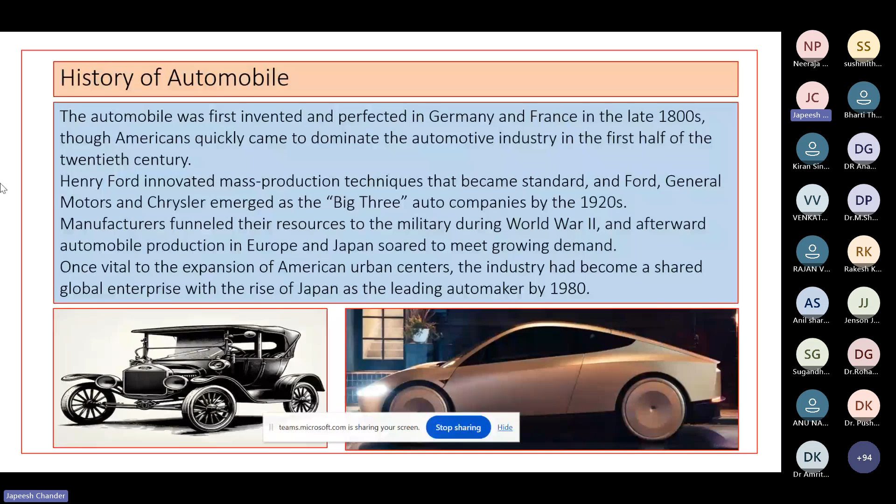So the early materials we were focusing on were only wood, metal, and leather. These were mainly used at the early stage: the wood framework and steel frame were used for making the body in white, meaning the shell of the cars, and leather for the interior.

Then some natural resources were used, like material which was in abundance in the localized region. Before globalization, the items or material available in that particular region were used. Like in today's scenario, we are more concerned about the 'vocal for local' slogan from the government, that we should put more focus on our local products, and that is one reason we are bringing all the industry to India. So we have a better future, better production systems, and better infrastructure.

Same is the case with production techniques. Earlier, how were they producing things? Look at the cryogenic engines. Nobody was sharing their technology on how they make the cold fuel so cold that it densifies, increasing the density so that they can store a huge amount of fuel in a small space, and it can run for hours, more than imagination. So for those production techniques, chemical engineering, mechanical engineering, and physics have all played a very vital role in these developments of material.

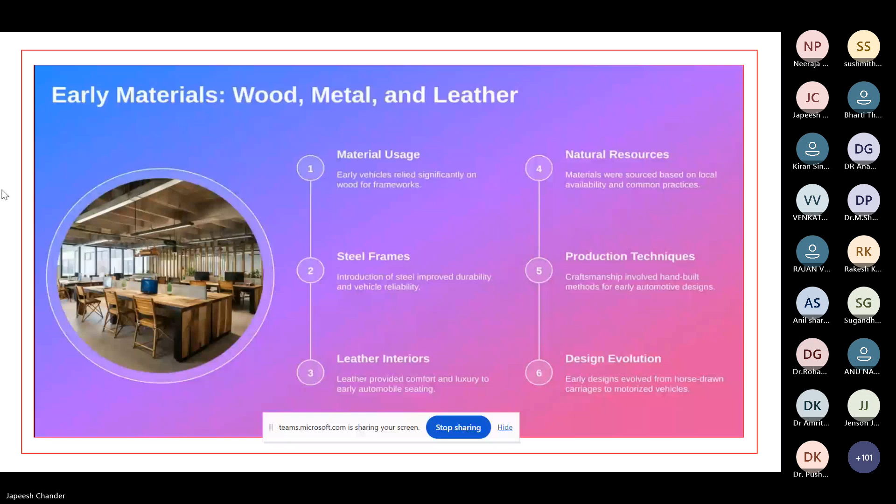Just to give you a small overview of the wheel: look at the initial stage, how we were using a wooden plank, just a wooden disc at the very beginning. And now we are able to make a carbon fiber wheel which can take a load of 535 metric tons.

Antonov AN-225, this is the Ukrainian heaviest payload aeroplane. It has its own weight of 200 tons, and it has a capacity to carry around 225 to 235 metric tons. That is almost 50 cars. All credit goes to the changed materials, the new innovation materials, the new processes, how they have synthesized the rubber and the carbon with the fibers to make them so solid and strong that they can withstand shock as well as endure the tremendous load on their back.

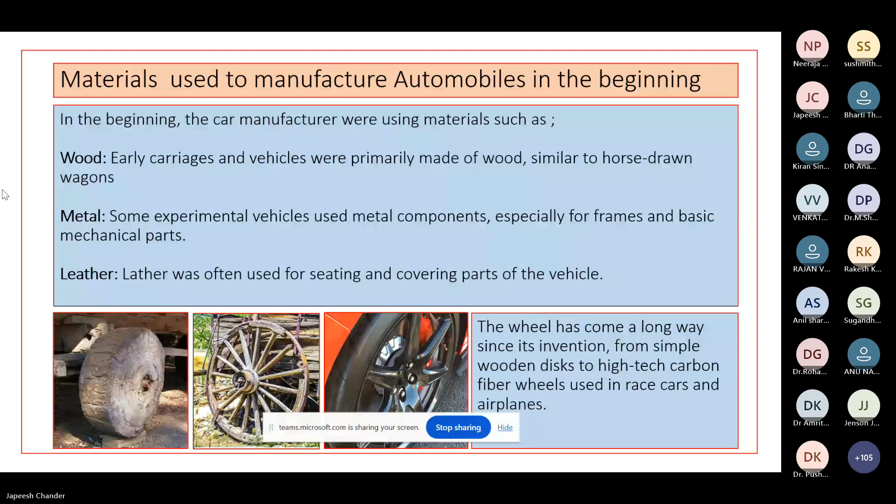Why were we discussing all this? Because of the necessity for these materials, which we must all be aware of. There was a series of global summits that took place.

1972 UN Stockholm, where we were more concerned about the environment. 1992 Rio Earth Summit. 2015 Paris Summit, where we became more concerned to save our earth because of the amount of load we have put on the environment on account of pollution, the landfills, the air pollution, the water pollution.

It is becoming horrible to live on the earth, and all this can be achieved by innovating new materials. Those materials should be sustainable, should have low carbon footprints, and should be manufactured in the industry at low cost.

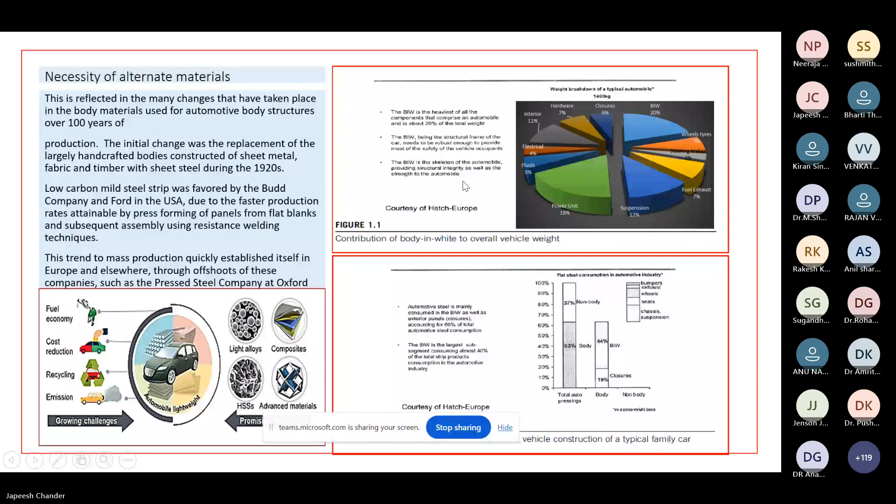So the main focus is sustainability in automotive. We should find materials that are more sustainable, which will help us sustain more innovative materials in the automotive sector and industries. I will show you some videos and pictures of how we have changed the scenario, how materials have evolved to withstand high temperatures, and how they are useful or create less pollution in the whole system. When we reduce weight, we are altogether reducing the load of the supply chain.

Suppose if a car of 1 ton has to be transported from one position to another, there would be some amount of carbon footprint left behind. If the same car with same capacity for 5 passengers and same durability, but of low weight, 900 kg or 800 kg, every 9 or 10 vehicles will spare one vehicle. The footprints of transfer and manufacturing are going to reduce. So that is how we are heading for sustainable development goals.

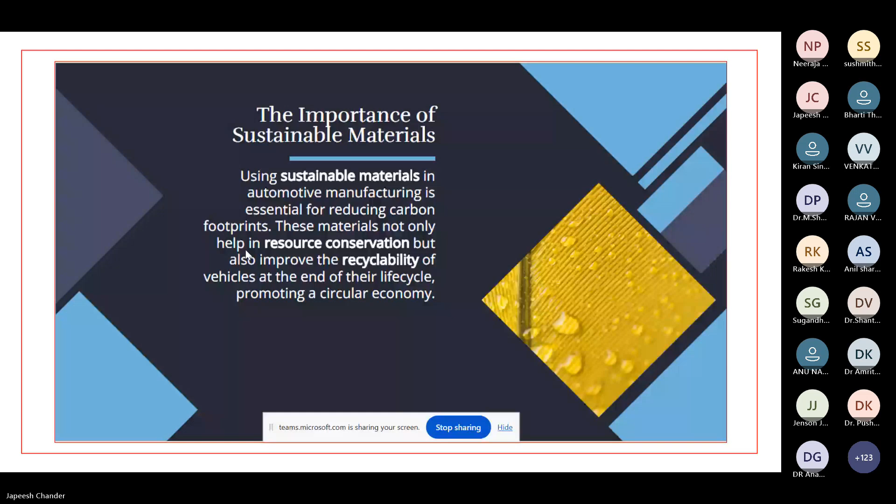Green sand casting process helps us cast components like gray cast iron, malleable or SG cast iron. And LFC is a lost foam casting process. These are the differences in the processes which I'm trying to explain here.

In the casting industry, casting is what we are manufacturing, and then it becomes the housing for other components, like you might have seen in the gearbox or the engine block. The engine block's outer casing is casting, the gearbox's outer casing is casting. I'll show you pictures of that.

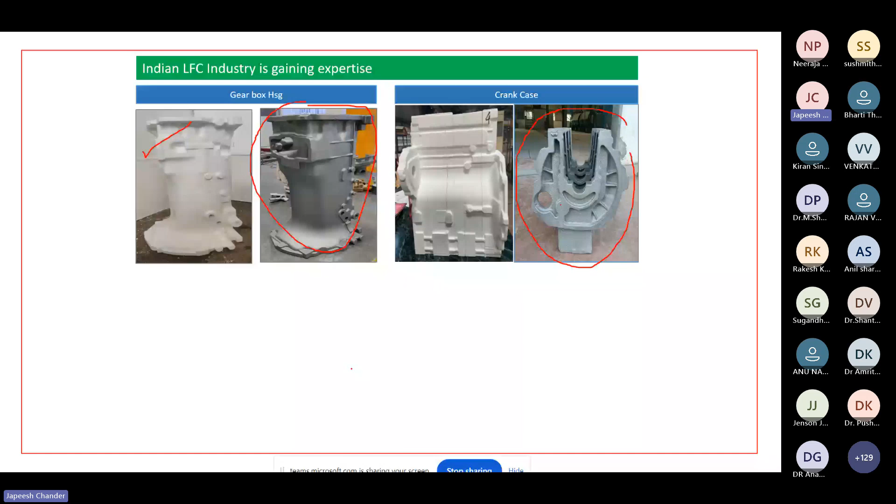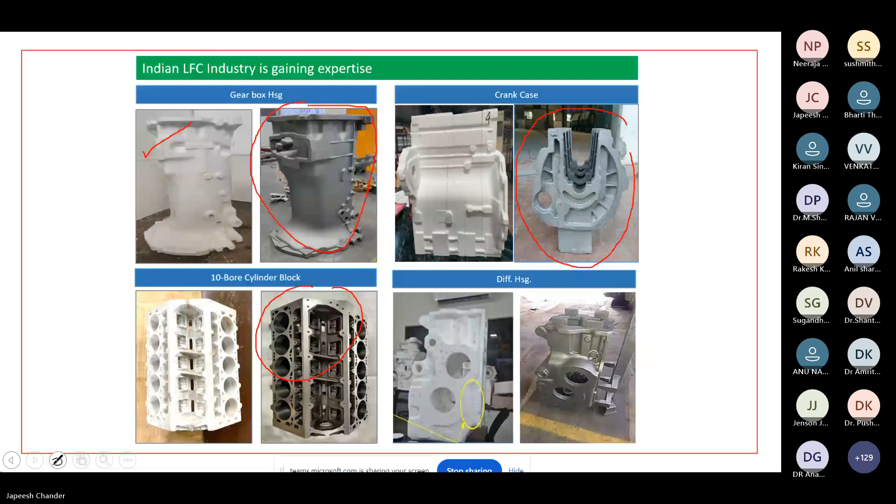So this is more important to understand why and how we are going to improve our material efficiency with the help of new materials that are lightweight. Now aluminium is also making its presence in the tractor industry. Earlier it was used in motor manufacturing or small casings, like motorcycle or scooter engine casings. Now it is also going into the manufacturing of tractor parts.

This will be the same way with magnesium. This is enabling agility and durability. Furthermore, another element which is making its way into the automotive sector and the tractor industry is carbon fiber composites. Composites are components of two different metals or two different items which have different characteristics, and once they are gelled together with the help of adhesive or some bonding agent, they give rise to a different component which has different properties.

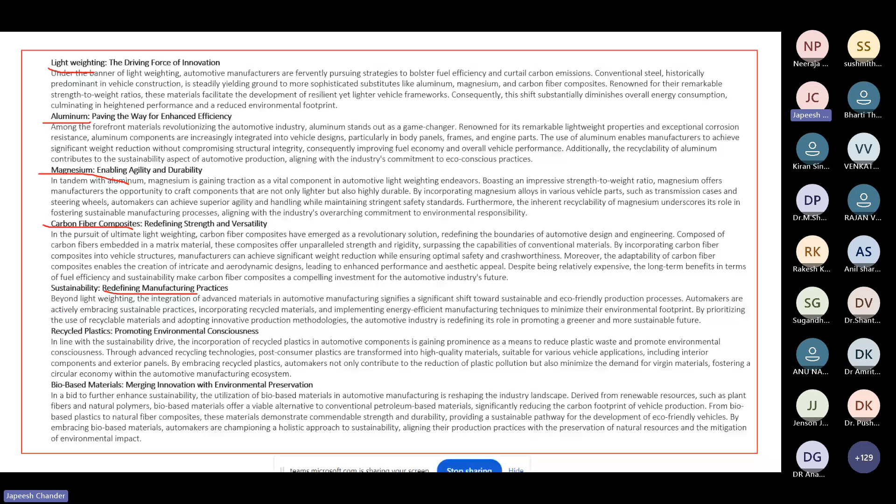So this way, using carbon fibers, magnesium, and aluminium for lightweight components, we are heading toward the sustainable objectives of our industry, redefining the manufacturing processes. When we are going to machine a lightweight component, obviously we are going to use fewer inserts in the machines.

At this point of time, I'll take you through another one more interesting example. So I'm just projecting another importance of material. Like when we are talking about the automotive industry, there is casting, and there is also forging. So I'm taking one example from the forging side, where we are giving shape to the component.

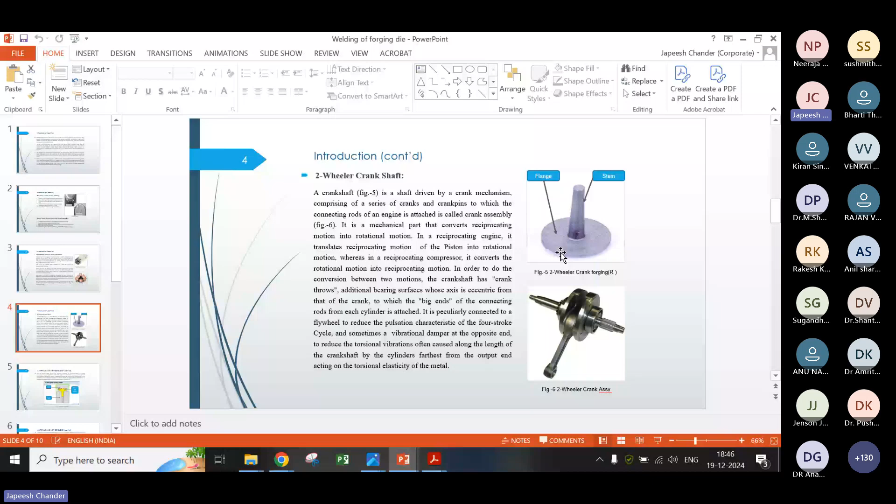This is the component, a two-wheeler crankshaft. The motorcycle or scooter we are driving comes with this sort of crankshaft which drives the whole motorcycle. So to manufacture this, we produce this particular component in the forging process.

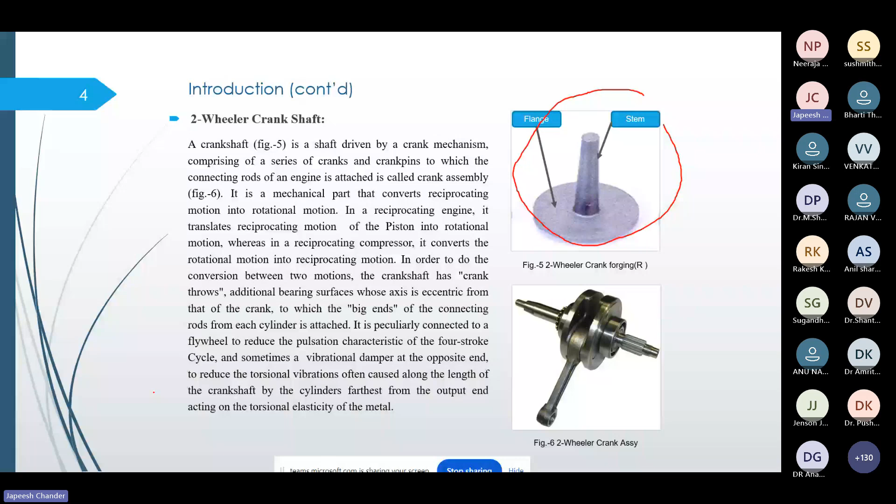So when we are producing it, there are dies which take the red hot piece and force it at around 1600 tons of load. You can imagine the amount of force being developed while giving shape to these components. Because of that, the material moves, the flowability of the material, thermal cracks, abrasion, and all these problems come, and these problems create issues for production economy.

If a die can produce 100 components and it fails at 80, it is a loss of 20 components to the industry, to the nation, to the globe. And if this die can produce 120 components against its set life of 100, it is a benefit for the company, the organization, the nation, and the globe, because it helps reduce carbon footprints. Everywhere you go, you will find this carbon footprint issue.

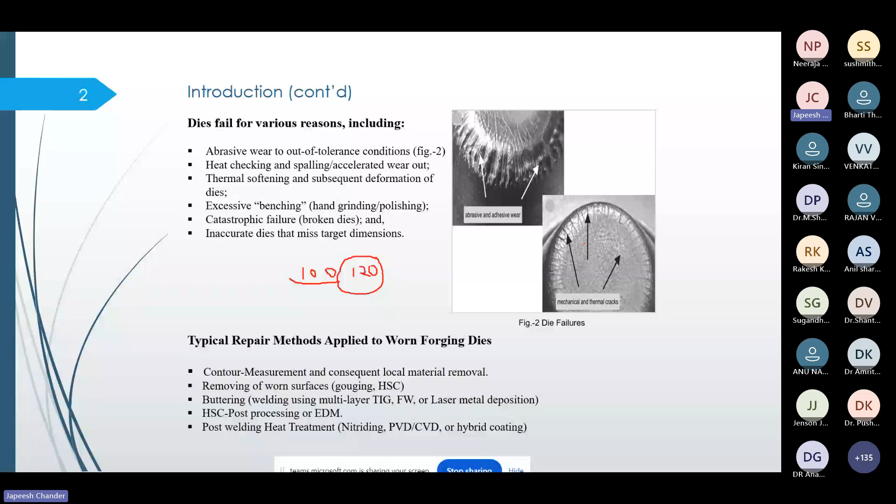So this is an actual experiment and actual development innovation which we have done in the industry. What we did, we made this die, we recut the die, and then we welded it. Look how the material is making its importance. We selected a welding rod which can help us withstand and increase the life of that die, which can withstand that 1600 ton force for longer times without getting deteriorated.

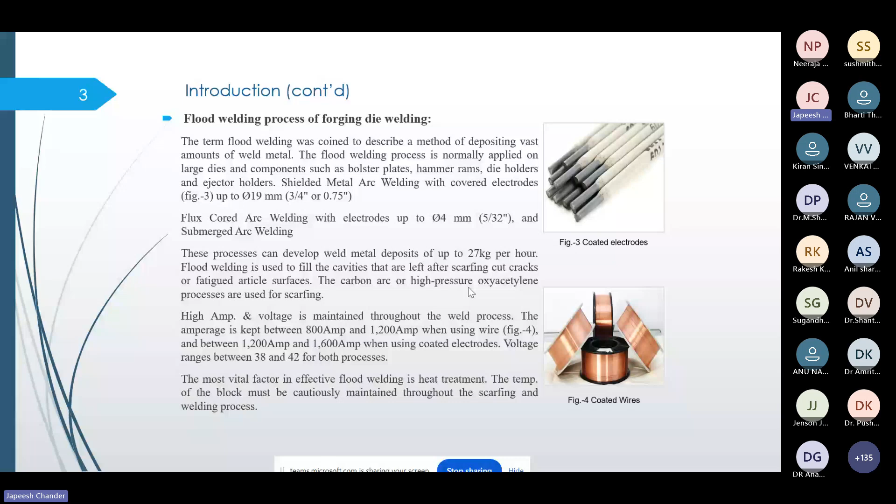Now this is the analysis. I'll tell you about all these simulations, how this material will flow. This is all linked with our chemistry - how the metal behaves at what temperature, at what force, where to restrict it, and while flowing, how it will create abrasion on the die, on the top face or the bottom face. All of this is science, all technical things which we need to simulate.

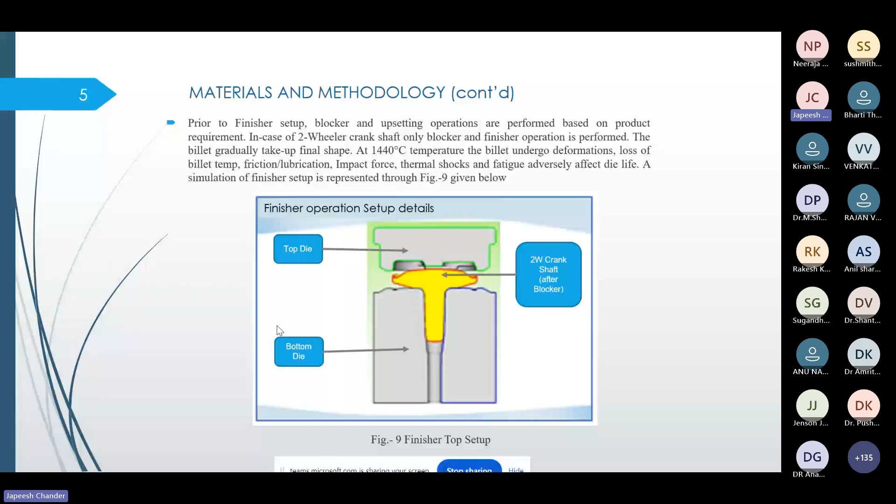We cannot build a big die and then take a trial. So these are the things our computer engineers can help us with, developing these softwares, so that with that amount of force, this forging process took place around 1100 to 1140 degrees centigrade, red hot, being forced with the pressure of a hammer, crank, hydraulic press, screw press, or servo press. A number of mechanisms are there.

When we are talking about hot forging, there are also processes like cold forging, which present different challenges and different positive points. So when we talk about hot forging, because of the heat, you can imagine that a component is a piece of metal, and this die is also a piece of metal, but its characteristics allow it to withstand more heat, more load - grades like D12, H13, H11, H10.

So a die faces a hot component which is around 1140, or sometimes around 1180 degrees centigrade, and on top of that, a force of 1600 or some 2000 tons. You can imagine what the scenario would be at that point, and we have to capture that scenario. Your engineers, your scientists have to capture those scenarios to make life easier for the industry, and this will help in reducing carbon footprints and heading toward newer materials.

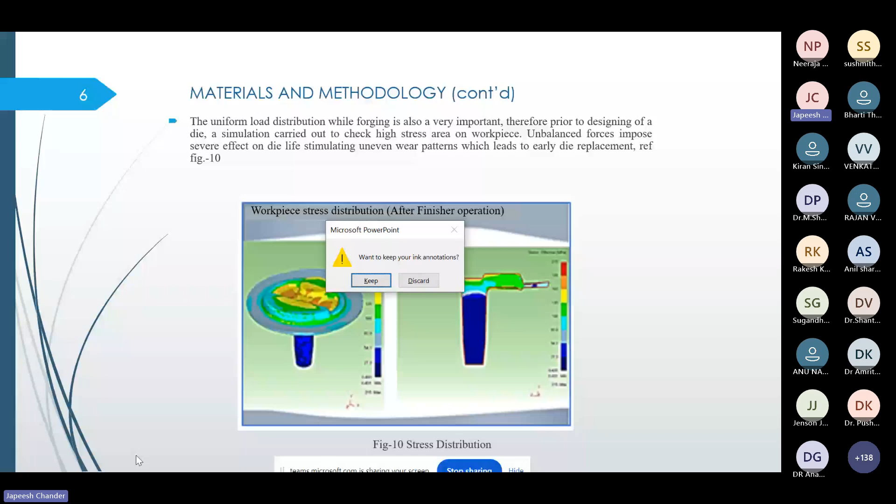Now, so what we did - we welded the die, we welded the die, and we heated it, and then we did the peening operation.

Peening operation in this material will help to make it more dense. The layer of welding, if you hammer the welding layer, it will allow more welding to accommodate in the same volume.

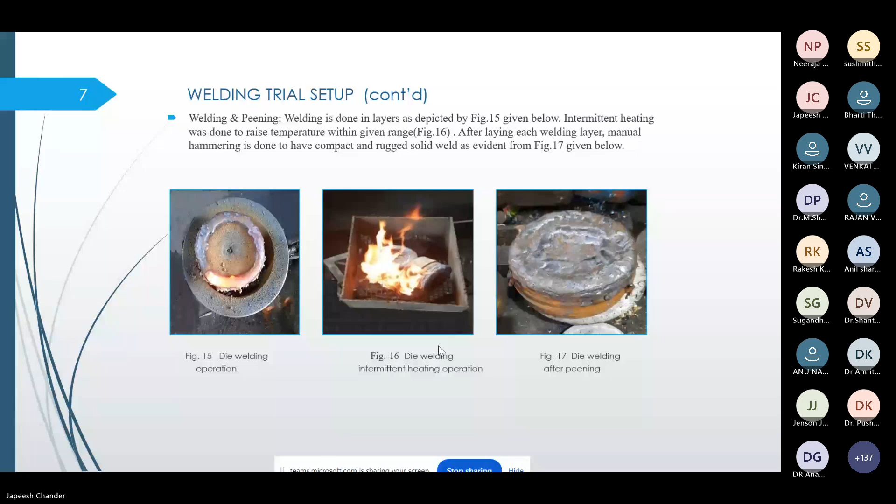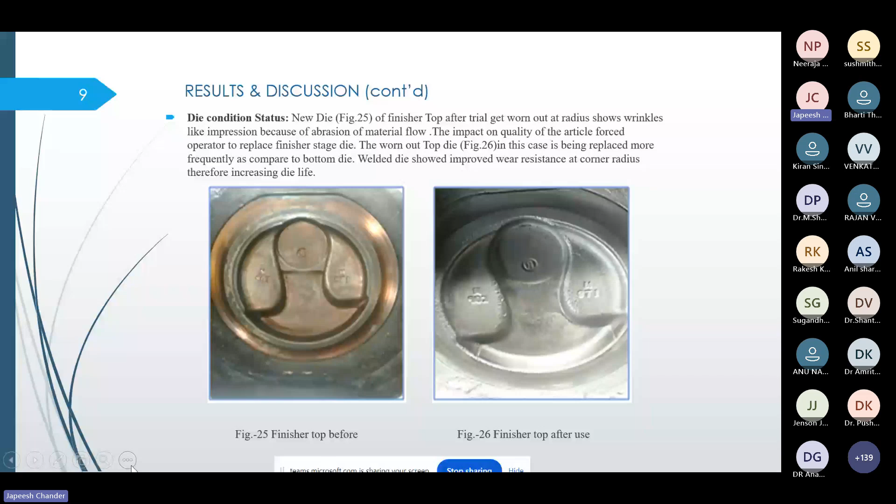Then we machine the die and use it. This was the initial die, and this was after the trial. By just changing the material or innovating a new method, a new process, a new material for welding, we managed to increase the life by 11.5%.

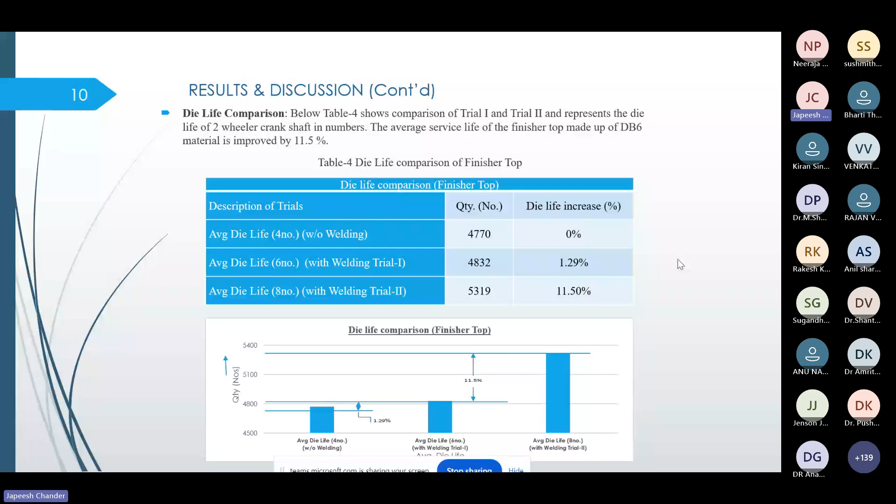This paper also we have published for the help of industry worldwide. So you can understand the material and the research on that material. It's very much required, and in industry, people are required who innovate things, innovate new materials, composite materials, smart materials, and all these are the need of the present scenario.

Going back to our slide, we were discussing why we want to go for these materials, because we need to make a sustainable stage. We need to set the stage for our coming generations in the automotive field. So more efforts are being placed on plastic.

You might have seen some gears in old vehicles or old motors, the metal or brass gears. They are now changing with new plastic gears, some embedded plastic, where the core is metal and outside is plastic, which are more resistant to wear, light, can be manufactured in mass without much wastage, can be reused with very low investment. This way we are taking industry to the next level.

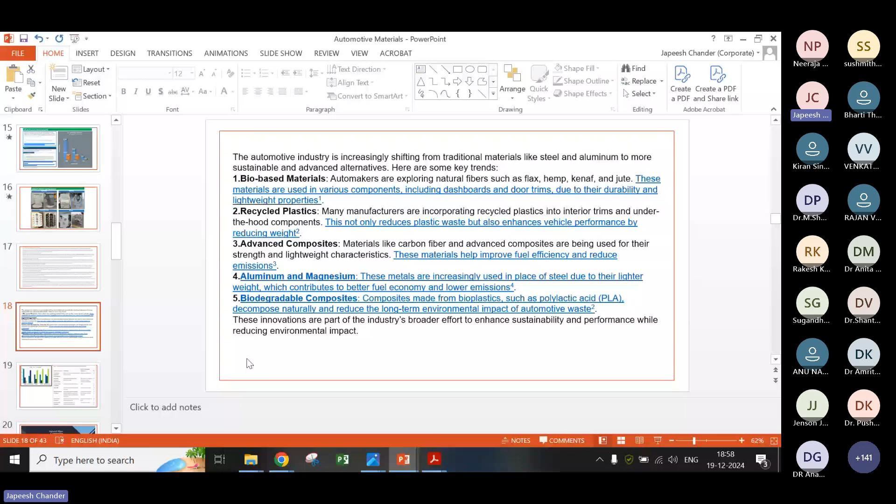Their stiffness... sorry to disturb you, interrupt you, but your screen is not fully visible. Please start the slideshow. I think the slides are also coming on the screen now. Okay, now it's okay.

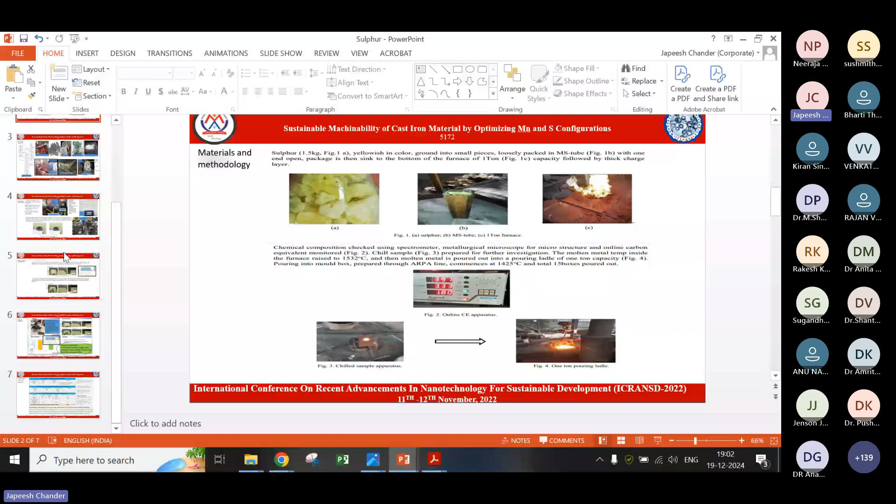This is about another slide which we are projecting to show you that we conducted an experiment and we succeeded in that, and later on we published this research.

We have added sulfur into cast iron Fg260. People from the chemical industry or from chemistry by background might know that sulfur is always considered an impurity in metals, but we use sulfur and harness different benefits from it. We increase sulfur - normally in the market, if you see Fg260 casting, the sulfur is only in the range of 0.05 to 0.08% throughout the industry if you search.

We just try to increase the percentage of sulfur. When we increase the sulfur, we also increase manganese in proportion so that it becomes manganese sulfide. Manganese sulfide is not a metal, it is not hard - it is a powder-like material. And when sulfur combines with manganese, it gives rise to manganese sulfide and gets embedded in the metal lattice.

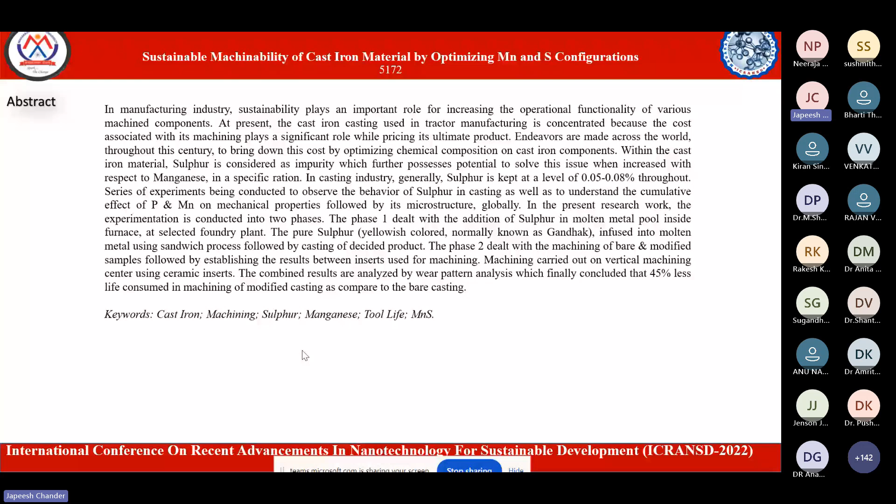It is not visible from the outside. When you put the metal under the microscope, you will understand that there are small flakes, similar to graphite flakes. So we did the trial, and this is very important.

You cannot add pure sulfur, which has medicinal properties, directly to metal because it sublimates. This is solid, and when you heat it, it becomes gas - it is not converted into liquid. It sublimates. So that was the major challenge for us: how to mix sulfur in the metal.

So we carried out trials. We make a hearth - if you see on the right side, this is a melting furnace. This is medicinal sulfur, pure sulfur - we can say it's almost pure sulfur. So we pack this pure sulfur into a tube, which is sealed at the bottom side, and it has a thickness of around 5mm all around.

And we kept the top side open - we just fixed it with a small plate without sealing it properly, because when sulfur heats through the walls of the metal, it will become a gas and can explode. So to avoid that, we just kept a small opening on top.

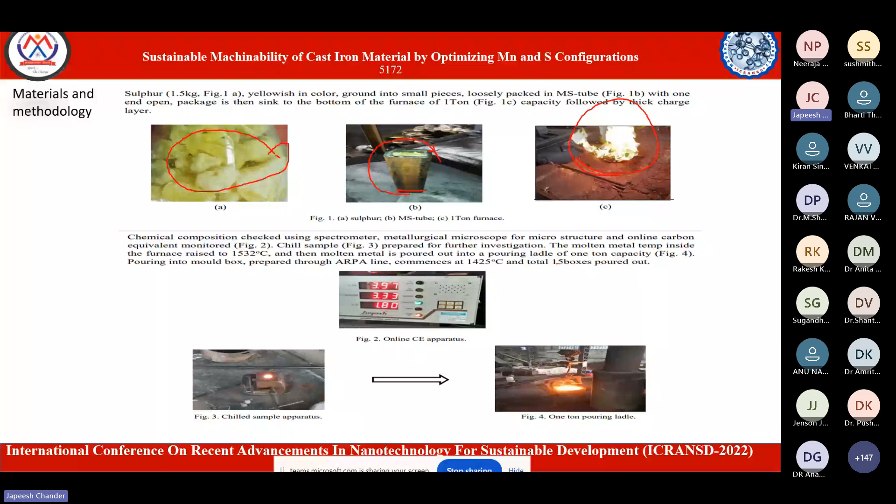So this was the complete process: raw material, storage, melting. We send the material to the heat lab. We confirm that the composition is correct for FG260 - carbon, manganese, sulfur, phosphorus, all in proportion within the specified range. And then we pour the material.

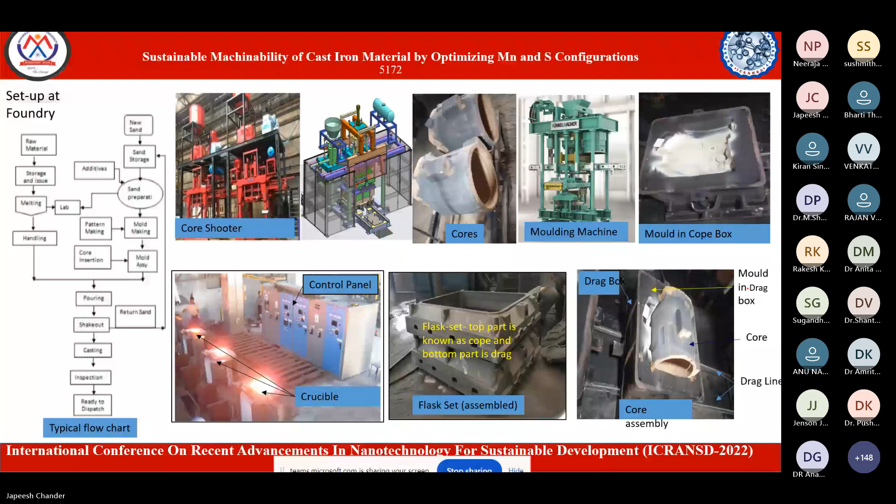The pouring process is quite different. This is a mold box. Then this is the sample, the cores, which form the inner side of the part used for the trial. This part is called the flywheel housing - also a tractor component. This is a casting, an FG260 component.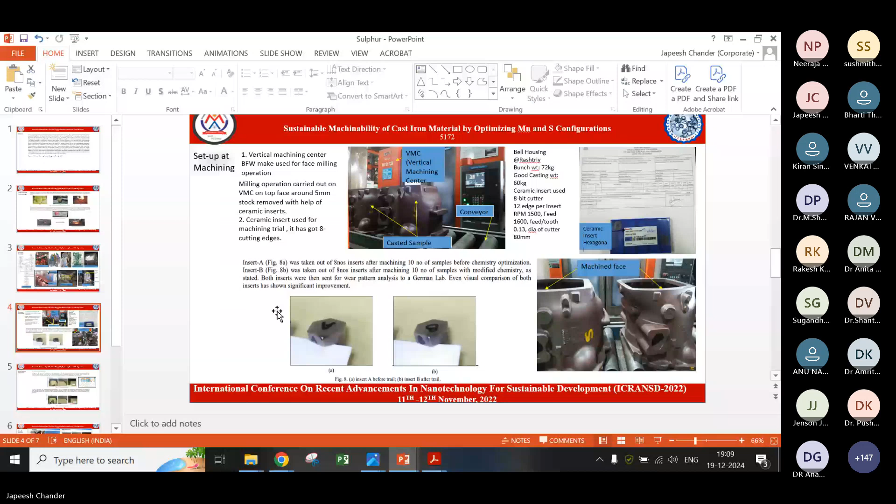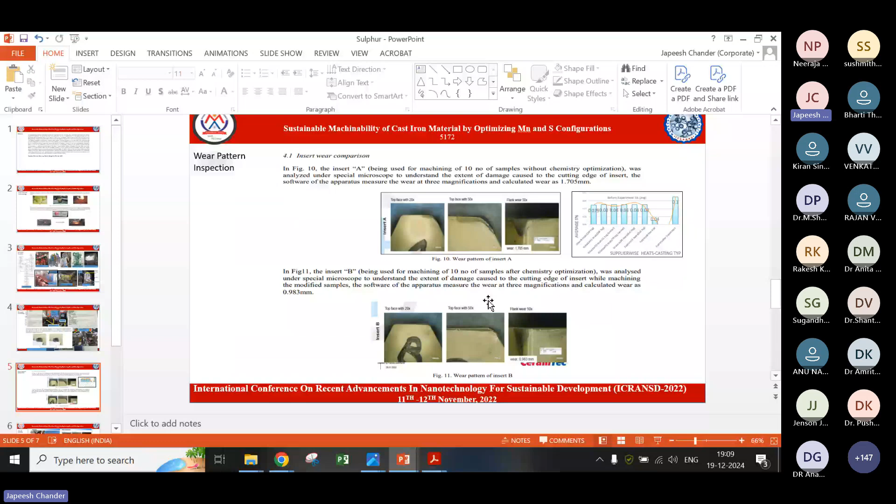So if I tell you about the composition... oh, I won't be able to show you the composition here because it's a bit tricky. So let me move on - we took this component to the machine shop. You have to be patient when doing research or developing materials.

This took me around 6 months to prove that sulfur and manganese, when combined in a better proportion, can reduce the machining cost. But everywhere you go, you will have some limitation of budget, funds and these things. So same was the case with this research.

So what we did, we made only 10 flywheel housings and sent them to the same machine. We chose one machine, one operator, one fixture, and one grade of insert. That insert was a ceramic insert, hexagonal, with 6 edges. CeramTec - that's what I was showing, because ceramic is making its presence everywhere, now it is also used as an insert.

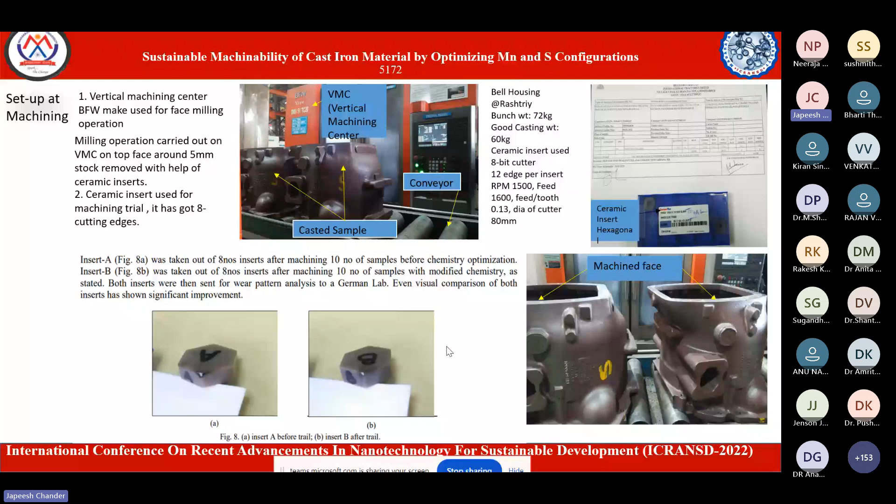So we made two trials, one without sulfur addition and one with addition of sulfur. But the life of this edge is around 200 pieces - that is a benchmark, so you cannot simulate 200 pieces with 10 pieces from a machine perspective. So we took two different inserts and sent them to Germany, because in India I was not be able to check the wear pattern and to what extent it has worn out.

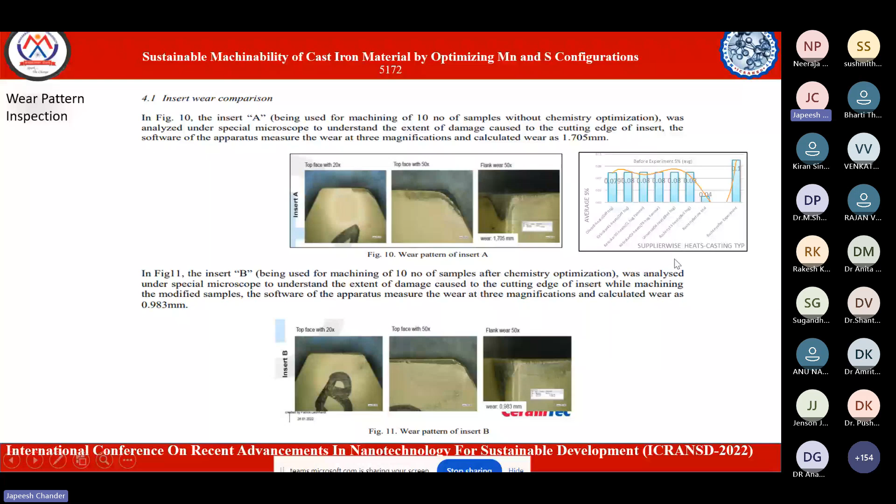So they gave us the top face, the different readings of how much it has worn - this is the first insert, this is the second insert. And we understand that we managed to increase tool life by 45%, and this is a tremendous achievement. If you ask any industry, with just an increase of sulfur in proportion to manganese, you can increase tool life by 45%. You are making a big profit for the organizations.

What is more important is your innovative approach. You understand that you cannot play with the composition of FG260. Yes, you can only play with the percentile - the percentage of the elements being used to make the final composition.

So why am I showing this, and how it happened - we researched further that those flakes, when we are machining a component, let's say turning it, we rotate the component and the tool is fixed and progressing into the component, heat is being generated. But when you have soft flakes inside the material, when the edge of the insert passes over that flake, it dissipates the heat. So the continuous heating process is temporarily blocked over the flake. Once it crosses the flake, again heat, then flake, dissipation of heat, again heat, dissipation - like that, the life of that insert gets increased.

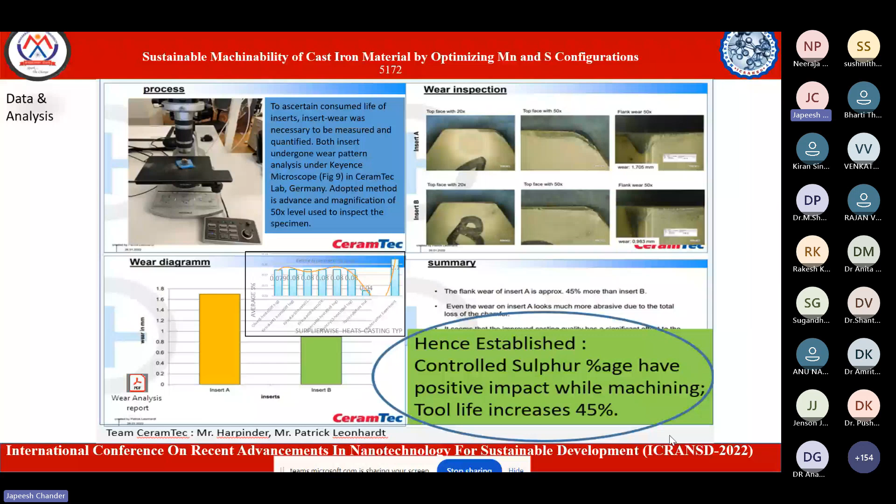So this is one thing which we did in the industry. This is how we are putting efforts to develop some techniques or materials, modify them to harness the benefits, to become competitive in the market, and also align ourselves with the global target of sustainability and sustainable targets.

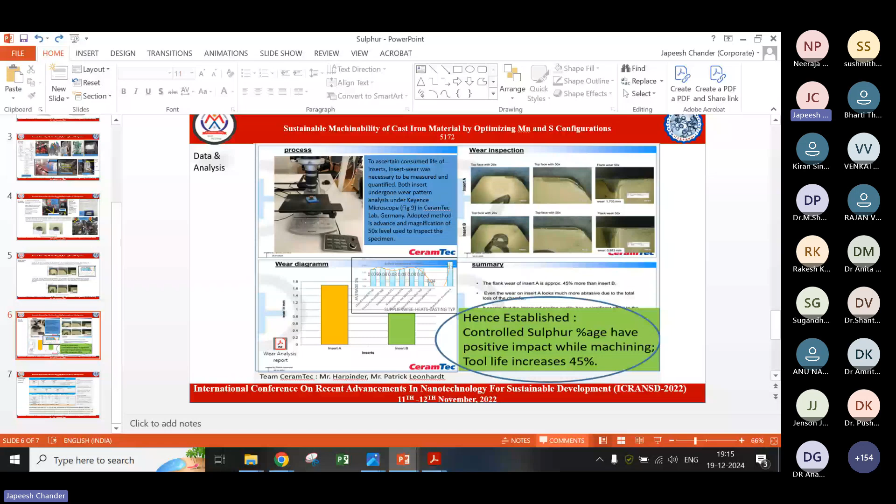So let's go back to composites. The next topic, after composites, is natural fiber composites. These are also important because industry has a pressure to reduce waste. When we are producing any component, we are also generating waste, so we have to reduce our wastage. We have to align ourselves with components or materials which are biodegradable, available in abundance in nature, where by using those materials we are not generating waste, or landfill, or any sort of hazardous pollution. And these materials are workable, they can be produced.

So the types of natural fiber composites and their comparable applications in automotives are: wood for electric components in the interior, then seat belts use sisal, hemp - hemp is used as an air filter in AC, this works as antibacterial, it kills bacteria. Coconut is used in the chassis, with high resistance to rotting and high yield strength. Cotton for seat covers, kenaf for engine pulley belts, flax for exterior design of the front grille, jute and abaca for rain wipers. Banana leaves are also being used in electrical wire covers.

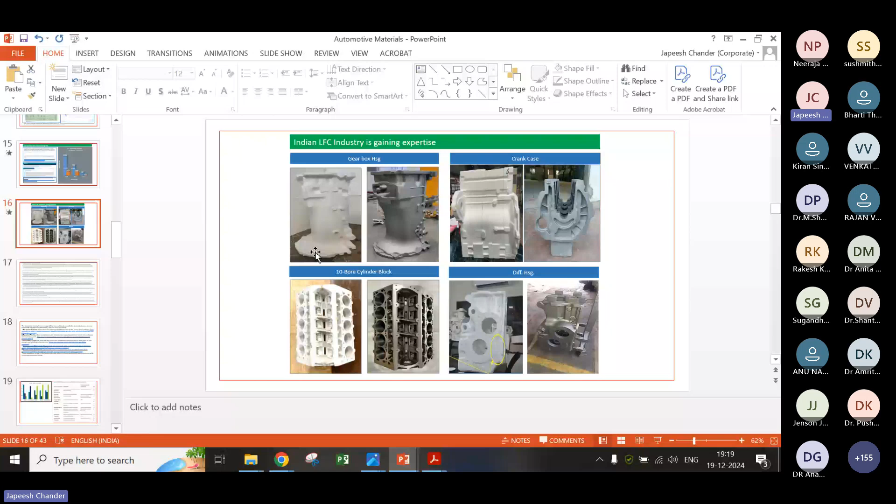If we are producing this casting with a green sand process, let's say this casting is 100 kg. So we need a core to make the cavity, the inner cavities, whatever is inside. We have to plug something there so that liquid metal should not enter into that space. To block that, we also use sand. So in green sand, we are using around 90% sand.

If you take a bigger option, say you are producing 10,000 metric tons of casting, you are going to waste 9,000 metric tons of sand. Where are you going to dump it? This is again an issue which we have solved, or the industry is trying to solve, with this LFC process, where you need not waste any sand.

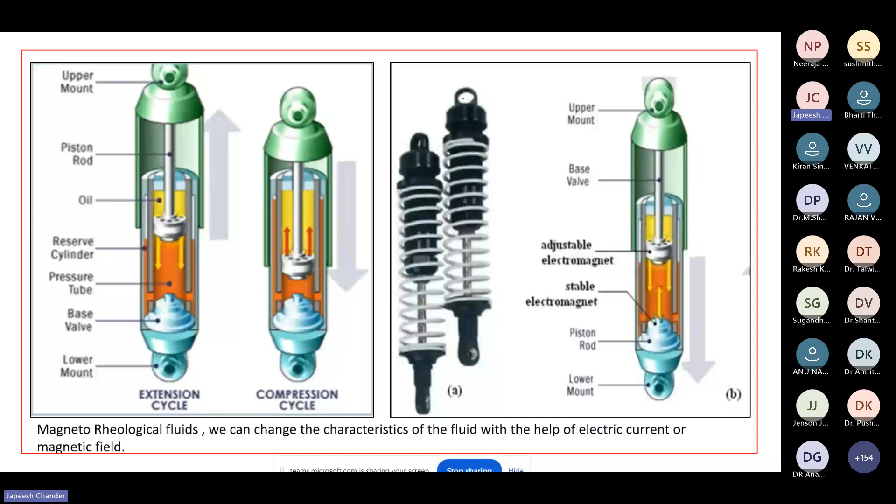When we change its viscosity, we can create different scenarios. You can see the earlier scenario of this spring and the fluid inside - once this is made, it absorbs only some sort of specific shocks. But when we use magnetorheological fluids, where the density of the fluid or the density of compression can be controlled at your wish, you can make different types of suspension systems. The same suspension system can work in the city, the same will work on rough roads, and the same will work if you are going for an excursion off the road.